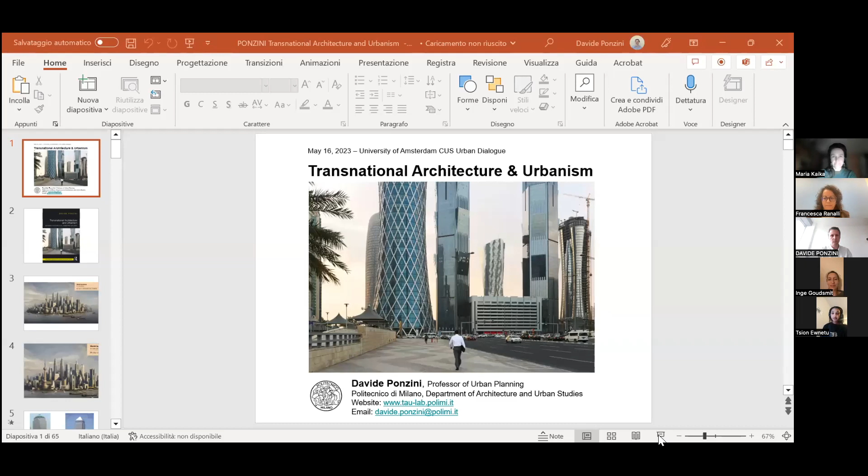I'm very happy to be here, and I look forward to the discussion. It's been quite hard for me publishing a book in April 2020. One of the pleasures is discussing the books and traveling sometimes. I just had some traveling start last year, and I'm still discussing this book. The COVID pandemic prolonged and made this discussion more virtual than it would otherwise be. But I'm happy, and I also built this other way of engaging internationally, which I understand is very useful.

As I mentioned, I really look forward to the discussion. I will try to briefly summarize some elements of the book—not the whole book, but I will try to unpack the main topic: how projects of prominent and iconic buildings and central areas in contemporary cities travel across space and affect transformation in multiple cities. My question is how to understand and learn from those processes in order to make them better, rather than simply analyzing and criticizing them, which is very much needed in my view, but also seeing it from a perspective of planning and making these processes possibly better.

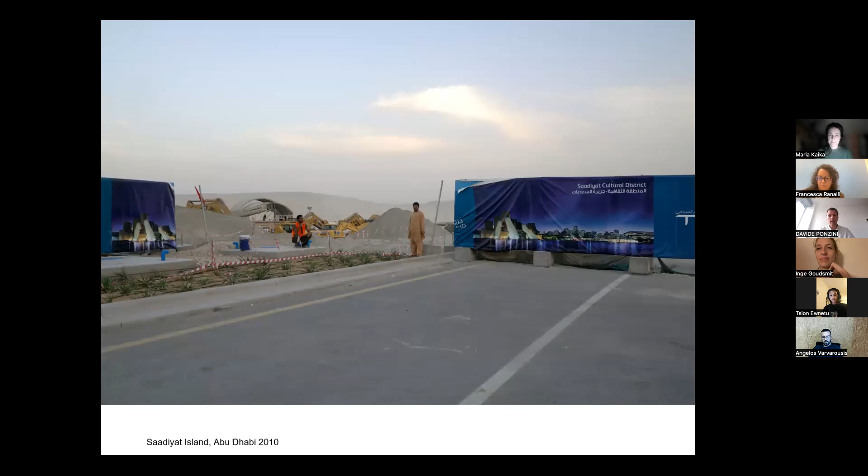Of course, that building again reiterates another story, the story of Bilbao, end of the 1990s—a very important project, the Guggenheim Museum, designed by Frank Gehry. And again, the same organization in Abu Dhabi with the same architect: Frank Gehry hired to do basically a similar project, but much bigger.

And guess what? It was designed by Cesar Pelli, who also master-planned the area, part of a much larger set of investments: a new subway system, larger infrastructure. Just to say that those, if I may, flying circuses, in fact travel around the world.

What we did is also track important cultural institutions such as the Guggenheim Foundation, how they traveled around the world and tried to sell package deals with a museum and a famous architect. According to the records, the director of the Guggenheim Foundation, Tom Krens, declared to have received in those years about 60 requests for the 'Guggenheim effect,' the 'Bilbao effect.' So, in fact, museum-cum-archistar expected to transform the fate of a city.

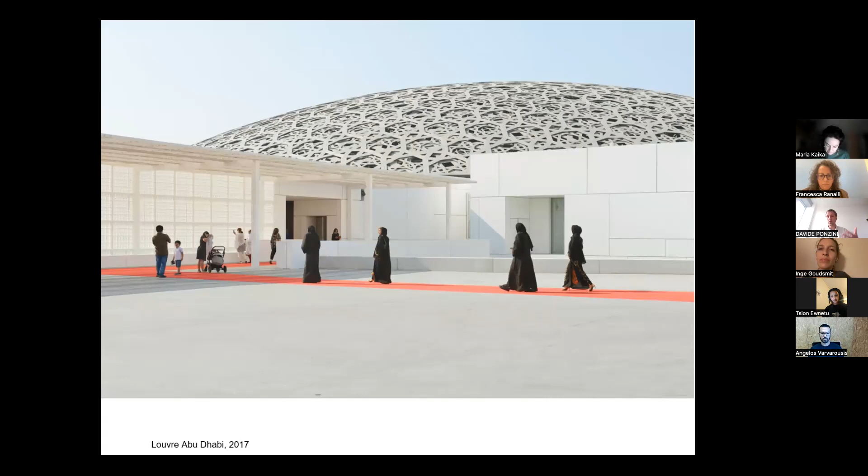So, of course, Abu Dhabi's example, again, is extreme. They have the Louvre, again another transnational connection to Paris, in fact a quite controversial one. But the process is ongoing, quite spectacular, I might say.

The museum is very amazing—I confess, I go every time I'm there. I visit it. I'm not contending it's not a good piece of architecture; what I'm saying is that it's there for the spectacle it generates. And what the architect, Jean Nouvel, the French architect who designed it, says is that this is a very special solution for the context.

This is basically one of the principles he has at heart. We will see this also later in my presentation, but it's important to say that the kind of light that is used through this gigantic, multi-layered dome you see at the top of this picture, and the way it frames the landscape, and also the way those white boxes you see right and left are the exhibition spaces. In fact, they are intended to resonate with the Medina, with some of the Islamic settlements.

But in fact, the situation in Abu Dhabi is of a very generic city. So despite having these clusters of important skyscrapers you see back there, or famous landmark buildings like the Louvre, the actual landscape of the city is very generic. This could be almost anywhere.

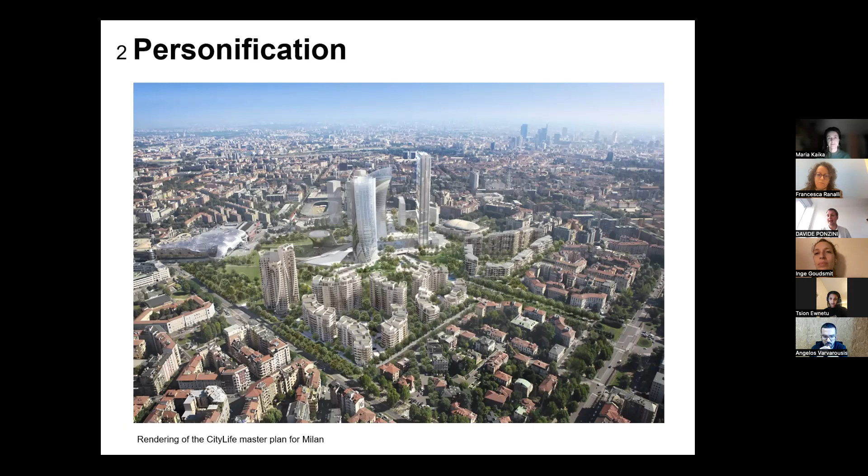I come back to my city, Milan. Here is a fairly large development project called CityLife, and it's this square that you see at the center of this rendering. It's now almost entirely built after some 15 years of work. What you see here, basically at the center, is a composition of three skyscrapers that were originally named after their designers, and to the front you see residence complexes, again named after those architects, which I will show in a minute.

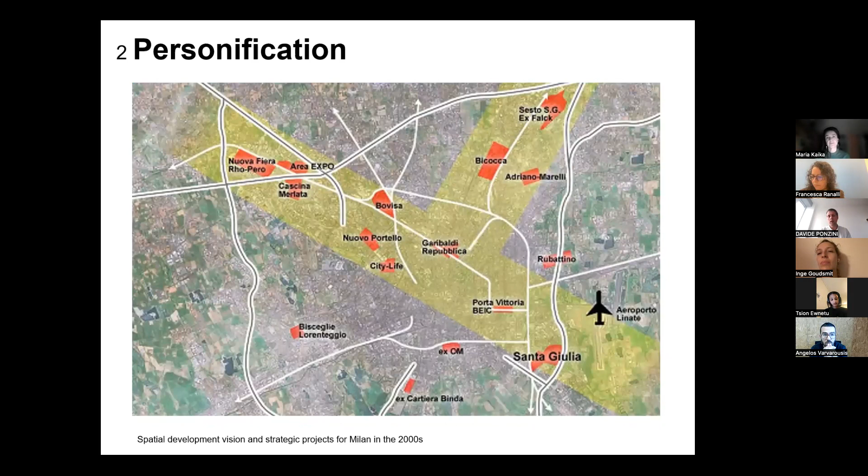This is CityLife. It's at the very center of a scheme that, since the 2000s, was supposed to drive large-scale development projects in the region, opening up a very concentric and closed form of the city, and generating new opportunities for investments. You probably heard about the Expo area or the new fairground, as well as the Porta Nuova development at the center.

These are official materials from the CityLife advertisement, and literally they name the towers Zaha Hadid Tower, Libeskind Tower, Isozaki Tower. Today, if you are wealthy enough, you can buy a Hadid apartment or a Libeskind apartment.

In fact, the architects' names are used to enhance the real estate value of the land, as the project was assigned through a bid where international funds came in and bid not only with a financial figure, but also through the projects. And the project that won, in fact, had the highest figure, no question.

But in order to reach that and make it credible to the financial system, they had to brand it. The brand is the persona of the architect, which allows the same apartment to be sold for a higher price. This is exactly embedded into the system, and my argument is that it may help make more money, but doesn't necessarily generate a better city or better urban forms.

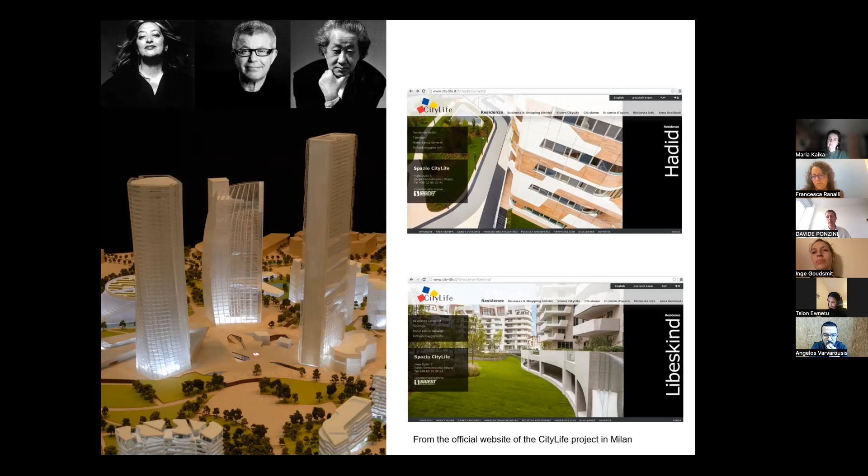This is the problem I'm addressing in my research, and it's very clear. Since the early photographs, it's not only the high-rise buildings that are problematic. Of course the debate was, I think, deceiving in a way, concentrating on: I like the skyscraper, I don't like the skyscraper. The point is that they introduced building types and, in fact, fractured the urban fabric in this way.

Almost unseen typologies generated semi-gated communities in what was supposed to be a public park.

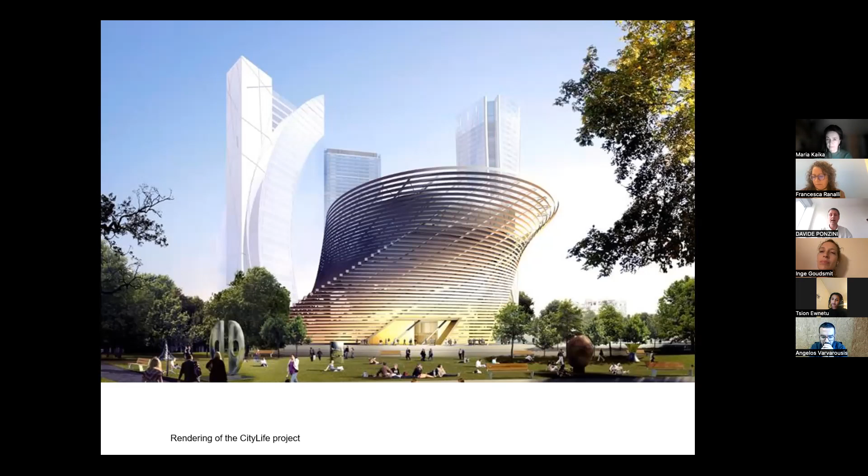Public gain for the community is the park I mentioned, as well as the Contemporary Art Museum of Milan. Believe it or not, Milan is at the center of the contemporary art market in the region, but it had no museum. So they said, okay, it's going to be big, we're going to make big money with the towers and luxury apartments, but then the city will finally get the museum. The same architect, Daniel Libeskind, will design a museum exactly for Milan. As you see, it's a square footprint that rotates and turns into a circle, supposedly inspired by Milan—in fact, the place where Leonardo used to live and operate, and the Vitruvian Man, so squaring the circle was part of this narrative.

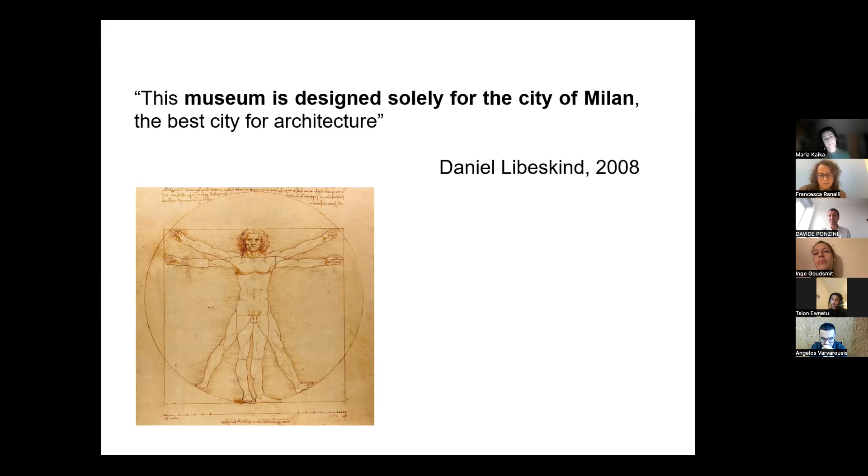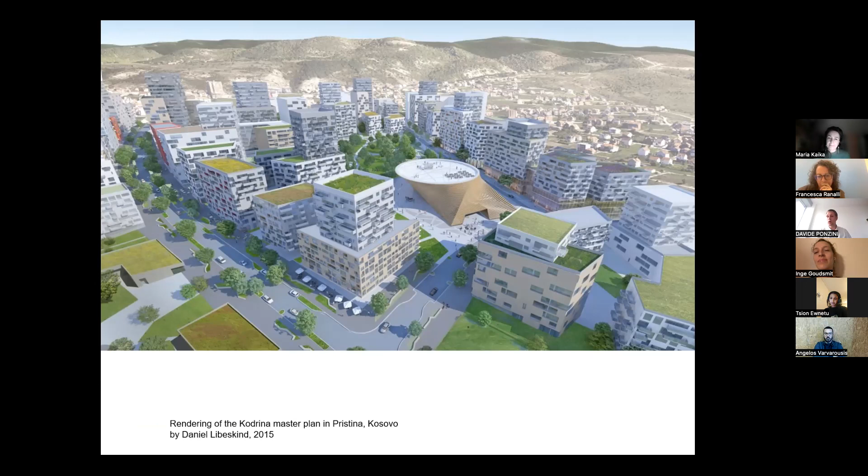And the quote by Daniel Libeskind: the museum is designed solely for Milan, the city of Milan, the best city for architecture, end quote. This is the next project by Daniel Libeskind in Kosovo. I don't want to comment or discuss it, but I leave it to your imagination to see where it comes from. Neither the Milan nor the Pristina projects were built, but the point is again to see this in connection.

And this is the formerly called Isozaki Tower, now Allianz Tower, the second tallest building in the city of Milan and in Italy. To the bottom right, you see the model by the same architect for a station in mid-1980s Tokyo. I'm not saying it's the exact same, but I contend that that form, that functioning, fits both well on top of a station in 1980s Tokyo and in 2010s Milan.

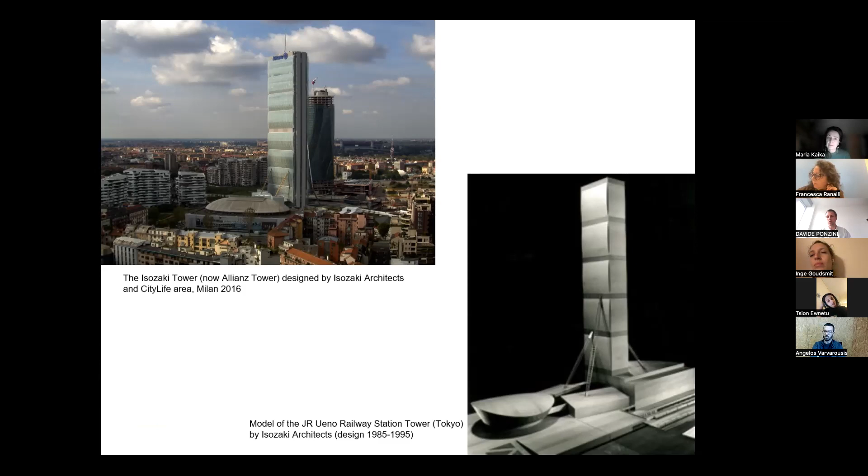So the problem, again, I don't blame it all on the architects. I think the city was quite absent, and the fact that they expected the architects and the big money to fix the planning for that part of the city was delusional. They took the risk to leave it to the private sector, and I think that damaged the private sector as well. Most international investors left the City Life project, and they had tremendous problems completing it, with occupancy originally. They even discussed turning the high-rise towers into residential, which from a planning point of view doesn't make much sense, but this was quite problematic and took 15 years to be completed.

So again, we can go back to this picture for the third and last bit of the book I'm presenting. I mentioned the Gherkin, this quite important and iconic building for the 2000s in the city of London, designed by Norman Foster. During those same years, there was another project that was quite similar and as successful as the Swiss Re Tower—that's the original name of what is called the Gherkin Tower—in Barcelona, by another designer, Jean Nouvel.

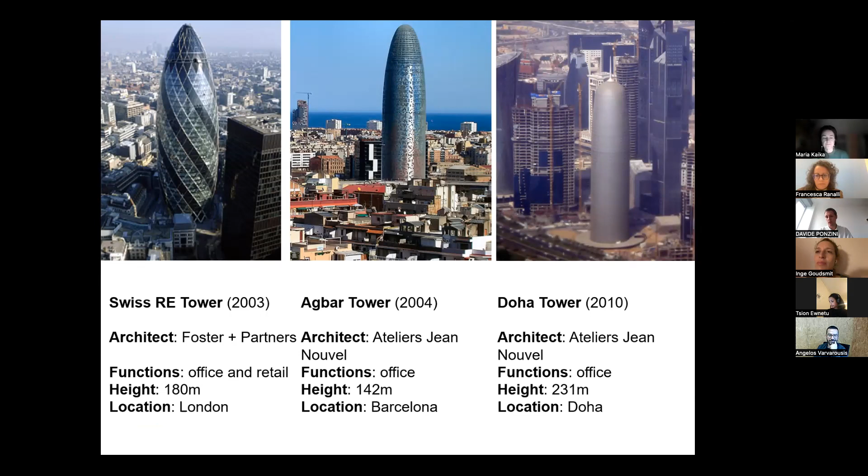So I'm not entering the cat fight of who had the idea first—my architect colleagues have their own theories, but I frankly don't see the point. In Barcelona, you cannot avoid seeing that tower. I'm going to compare it with another tower in Doha, in the Persian Gulf region, also by Jean Nouvel, but taller. Again, the point is to draw some links and try to make sense of those transformations. One way to do it is agency: understand where Jean Nouvel's projects were completed—early in his career in Europe, expanded to Japan and North America, and finally in the Gulf region.

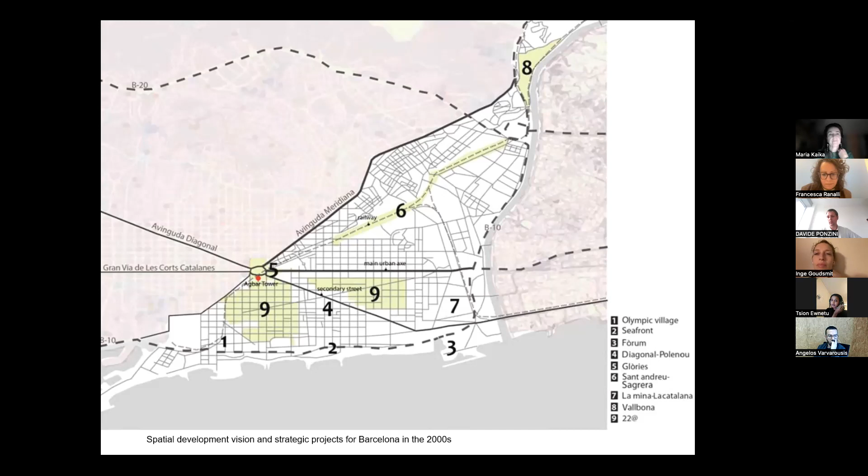As you see, those are spectacular buildings—they use the same devices, lights and height, to stand out. In the first case, you see this map: this project was at the very center of a large development vision for the east part of Barcelona. The red dot is where the Jean Nouvel Tower is, at the center of three main axes of the city. This is why you can see it from almost everywhere, part of the redevelopment of this Poblenou area. These pictures show that, at least visually, it was very, very visible.

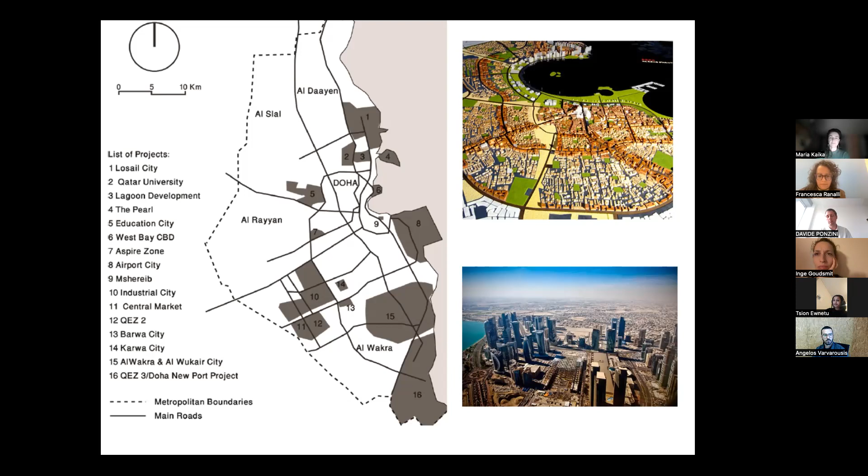The other project is part of a very different approach, basically chopping the city down into large quadrants and large pieces of land. You see number 6 is the new CBD, shown bottom right, and that's where this other tower, the Doha Tower, stands—the name itself is important because it was expected to symbolize this. Going back to the picture on the cover of the book, you can see the tower on the left-hand side, but also other towers: the Sandwich Tower, the two Palm Towers, the Tornado Tower, and you name it—all funky-shaped buildings clustered together in a situation where if you don't have a car, you literally risk your life.

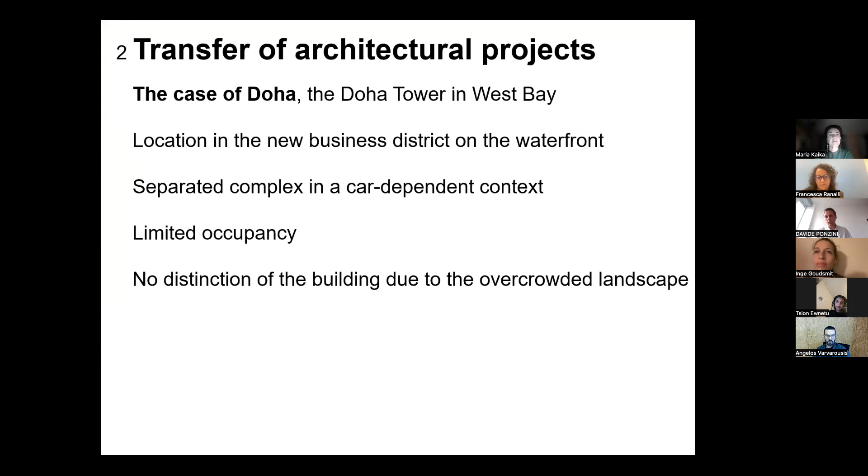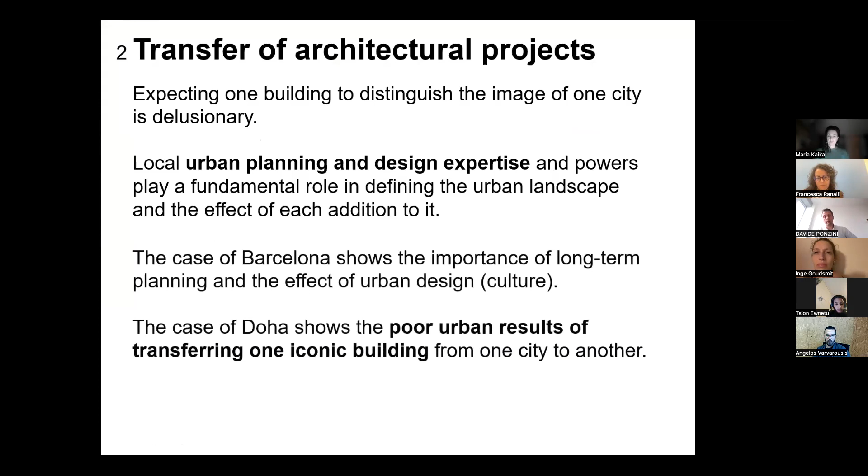So I'm going to argue once again that this is more and more similar to what we saw as 'No Place,' as the Financial Times described. This transfer is a strong means for homogenization and for obliterating the sense of place, sometimes leaving behind the public space and also the infrastructure that serves the many, rather than the few that make money out of real estate.